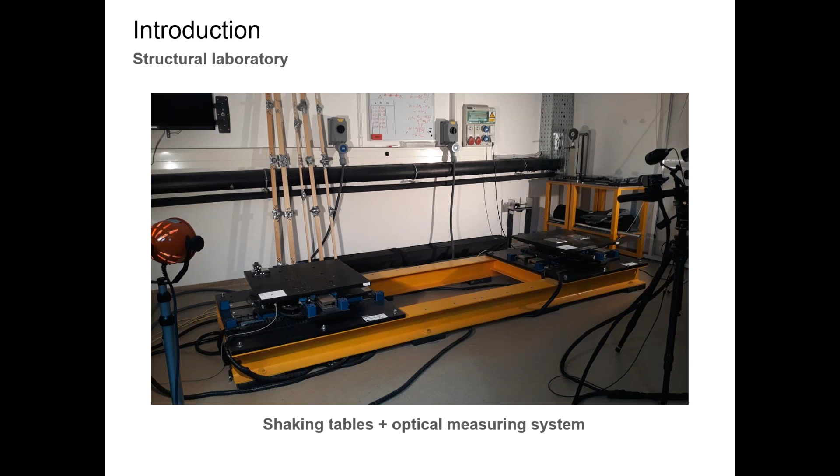And all the research has been supported through the research projects: Evidence-Based Characterization of Dynamic Sensitivity for Multi-Block Structures, Computational Simulation and Experimental Validation, which ran between 2013 and 2015, and the current research project, Configuration-Dependent Approximation in Nonlinear Analysis, Finite Element Analysis of Structures. These two research projects have been funded by the Unity Through Knowledge Fund and by the Croatian Science Foundation. The actual equipment has been acquired through another project, the Research Infrastructure for University of Rijeka Campus, financed by the European Fund for Regional Development.

My colleagues Nina and Miran and I were actually new to this analysis. So it is very important to say that the design of this lab and the idea for the research originated from our late colleague and friend, Professor Nenad Bičanić, without whom really we wouldn't be talking about this today, because we would never really be made aware of all the possibilities of the research that he has instigated here.

Professor Bičanić was a graduate of the University of Zagreb in the capital of Croatia, and worked as a project engineer in Croatia and the Netherlands. Later he joined academia and became associated with the University of Zagreb, Boulder, Swansea, Rijeka, and Glasgow. In Glasgow, he was also head of the Department of Civil Engineering, and was one of the founders of the National Society for Applied Mechanics in the United Kingdom in 1993.

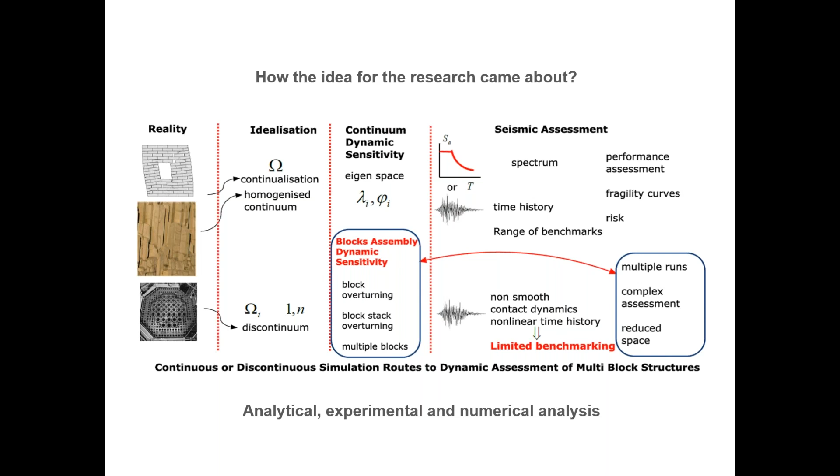We often have to repeat the analysis for many different variations of the internal parameters. So the idea was to set up a set of rather simple, small benchmark problems in which we would be able to analytically, numerically, and also experimentally run and have reliable answers to simple mechanical problems, so that we can validate our commercial programs against these examples.

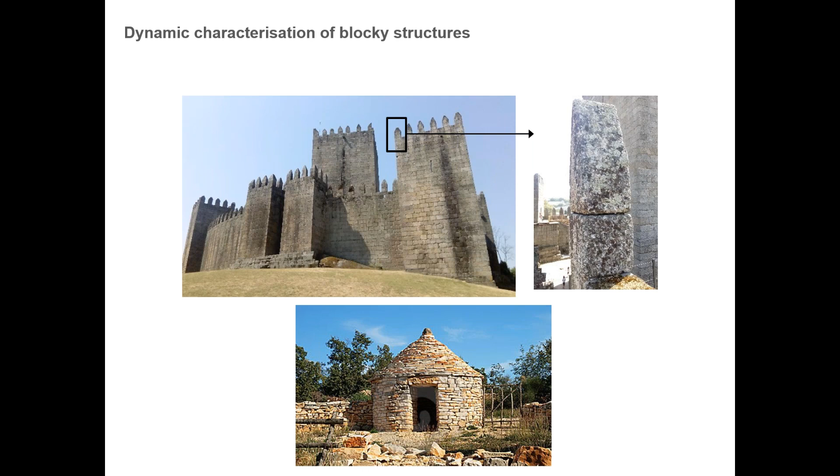What happens there is that you have such honeycomb structures in which you have these nuclear cores which burn. Nobody really knows what is happening with the actual structure, which has to be discontinuous because of the high temperature gradients these blocks are exposed to. So how they react to seismic excitation is something that is really more guessed than actually known.

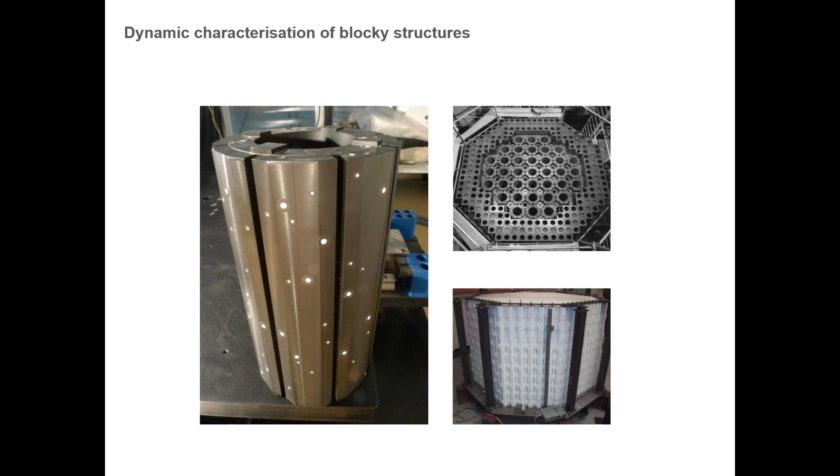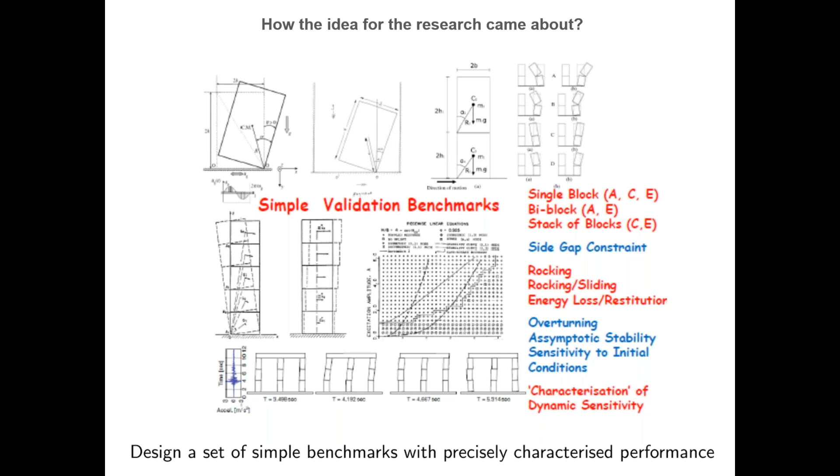The idea for this research, or rather the way to operationalize it, was to concentrate on some simple blocky structures or stacks of these structures, and to analyze how they react to seismic ground excitation or some other sort of ground excitation, and see whether they continue to rock in a stable fashion, overturn, or simply translate with the ground.

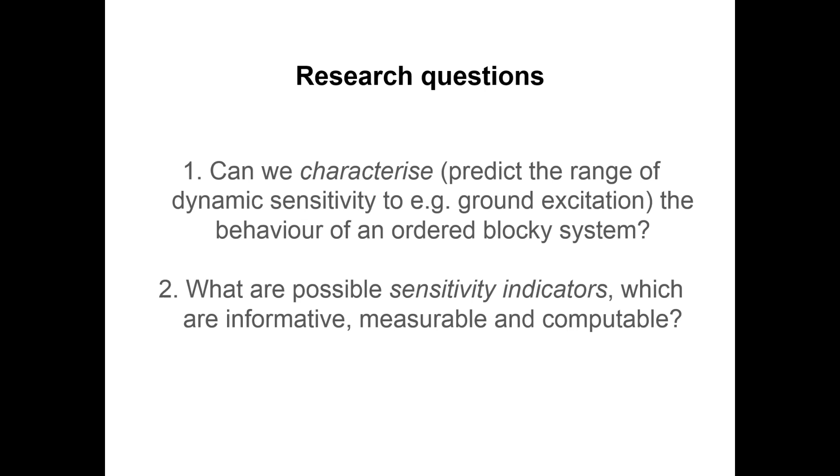Our basic two research questions are: can we characterize the behavior of an ordered blocky system? By characterize, we mean, can we predict the range of dynamic sensitivity to external influences, such as ground excitation? And also, can we come up with a number of suitable sensitivity indicators which we can measure and compute, and which are really informative, illustrating clearly the performance of the system.

This is how our structural dynamics lab looks today. The main part is these two shake tables, and we have the optical measurement system, as I said, with appropriate software. We also have some other equipment which we occasionally use, but we won't be talking about that today. And we have made up a little corner, as I showed you here.

Now, when you enter our structures lab, it looks like this. So this is the whole structures lab, and on the right side you see our little seismic corner.

What I forgot to say is that on top of this, we also have one small STI-40 platform. And what happens next is my colleague Miran will tell you something about the research we have conducted on this. Thanks, Gordan. My name is Miran Tuhtan, and in this next part I will talk about my use of the STI-40 platform.

The subtitle of my part is Assessment of Rocking Stability of a Rigid Rectangular Block Standing on a Deformable Elastic Beam due to Continuous Harmonic Excitation. In the next couple of minutes, I'll try to explain these bolded phrases in this subtitle.

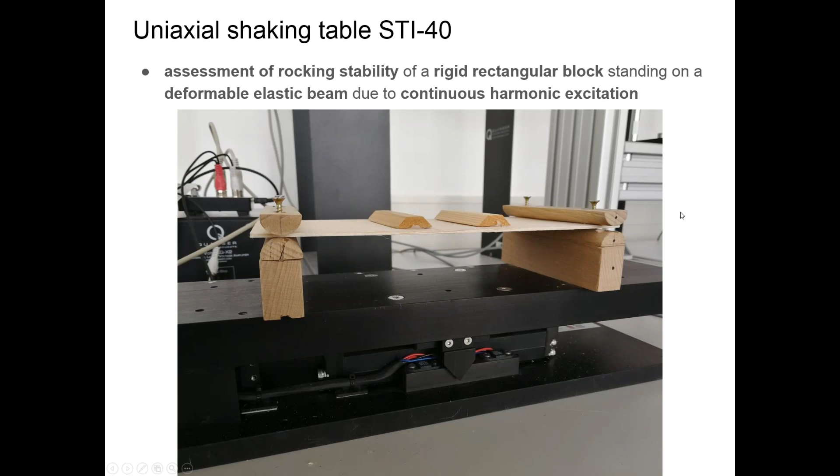Here you can see the system we use. This is the shaking table STI-40, and above it you'll see what's there. So the first thing to explain is the deformable elastic beam.

Here you can see three of them. They are made from balsa wood, which is very soft and elastic. We've made different thicknesses, so we can explore how different thicknesses and different elasticity help with the rocking stability.

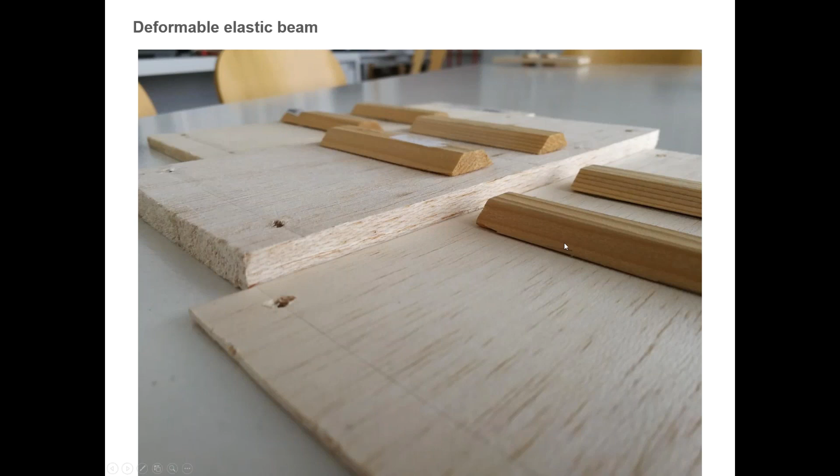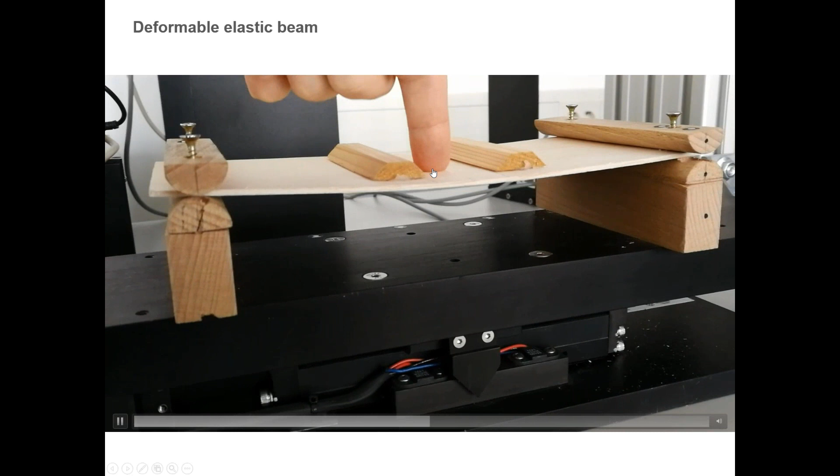Here is a video example of its elasticity. Here you see my finger pressing not that hard, and the deformation is highly visible.

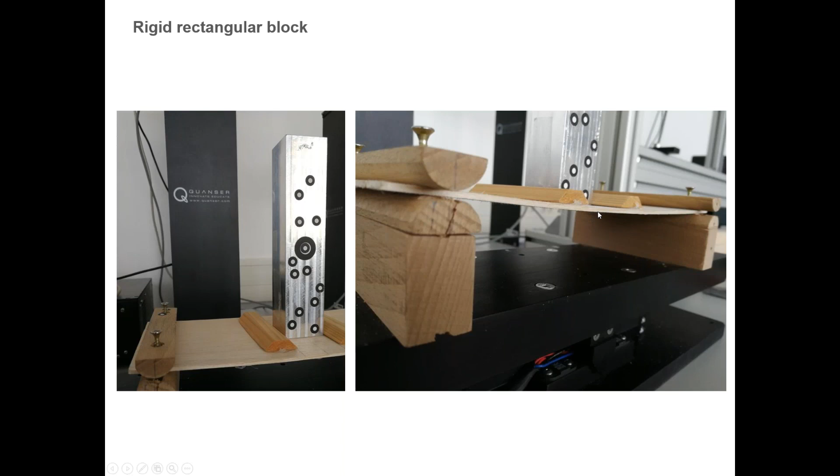Next thing in the subtitle is continuous harmonic excitation, and here you see a sinusoidal wave. This is what most of us think of when somebody says harmonic excitation, and this is the first type of excitation we did with our platform.

This was all well, until we realized we have a problem here at the beginning. The reason is here you can see the amplitudes as they change in time - this is a sinusoidal wave, and the velocities of this motion are cosine waves. That means where you have maximum amplitudes, you have zero velocities, and vice versa, where you have zero amplitudes, you have maximum velocities. That's okay here, but at the beginning when you start the experiment, you don't have maximum velocity, you have zero velocity.

So we need to modify how we do experiments, and we came up with this kind of graph, roughly divided into three parts. The first part is the ramp up period, where we slowly increase our amplitude from the central point to the maximum amplitude. In the second phase we have a pause, allowing our block and the system to stop shaking and movement. Then the third part is the cosine wave, similar to the top graph, which we use to see how the block moves.

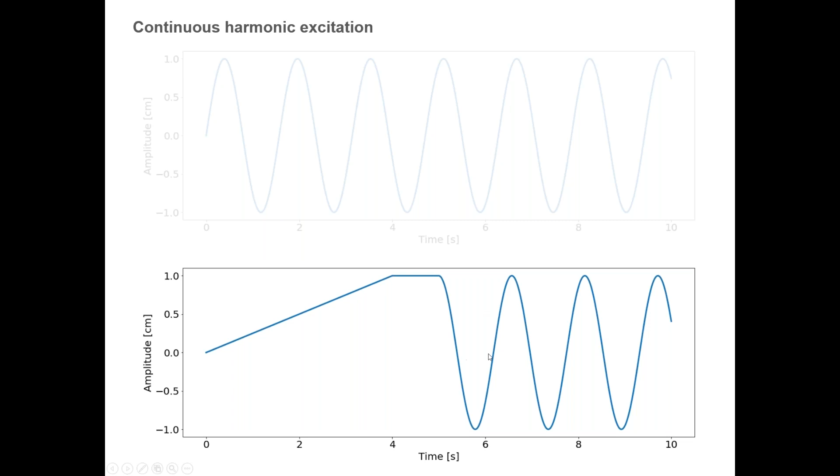The last thing I'll explain is the first part of the title: assessment of rocking stability. We have three types of motion of the block. First is translation, and here you can see the parameters used: 0.5 centimeter amplitude and 1.5 hertz frequency. Here in the video you'll see all parts of the motion.

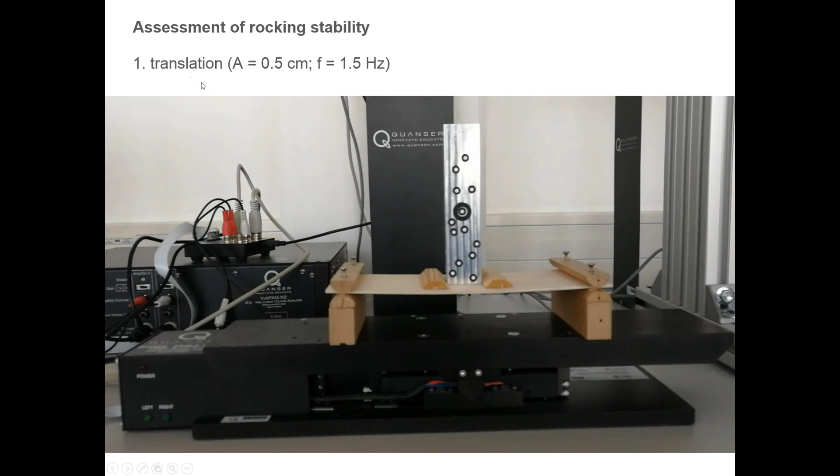First is calibration of the platform, then the ramp up period, a pause, and after the pause the whole system starts to move. As you can see, the block moves together with the base, so there is no rocking - the block is having translation motion.

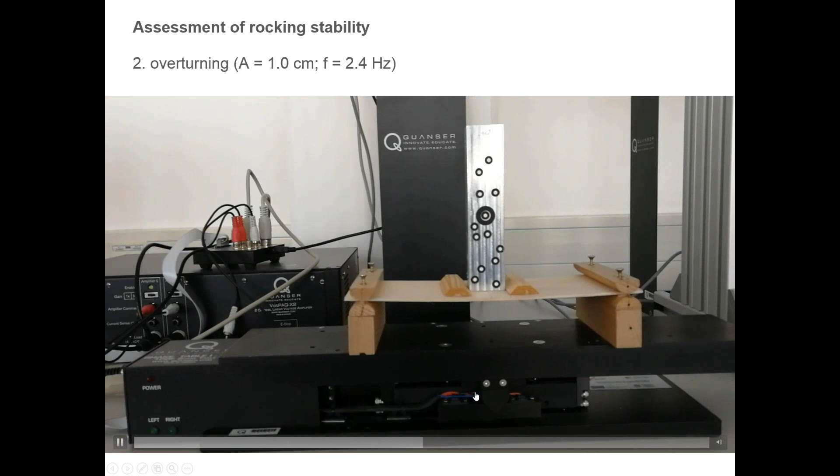The second type of motion is overturning. For bigger parameters of amplitude and frequency, you have higher accelerations. What happens is shown in this video. Once again, this was calibration, ramp up, pause, and now it will start to move. As you can see, the block fails quite fast.

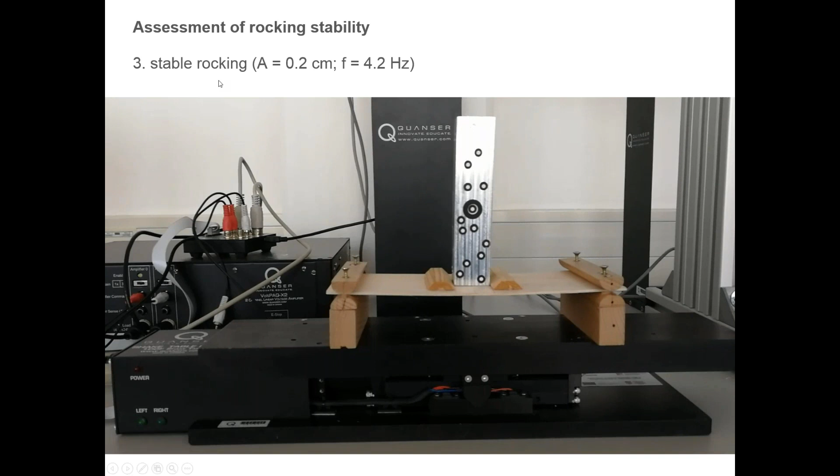The third, and for us the most interesting part, is the stable rocking, shown in this video. Once again the same thing happens: first calibration, then the ramp up period - quite small - then pause, and after that the block starts to shake, and you see it's stable rocking, it doesn't overturn. I hope you can also see that the base moves and vibrates because of the impact of the block on the base on every turn.

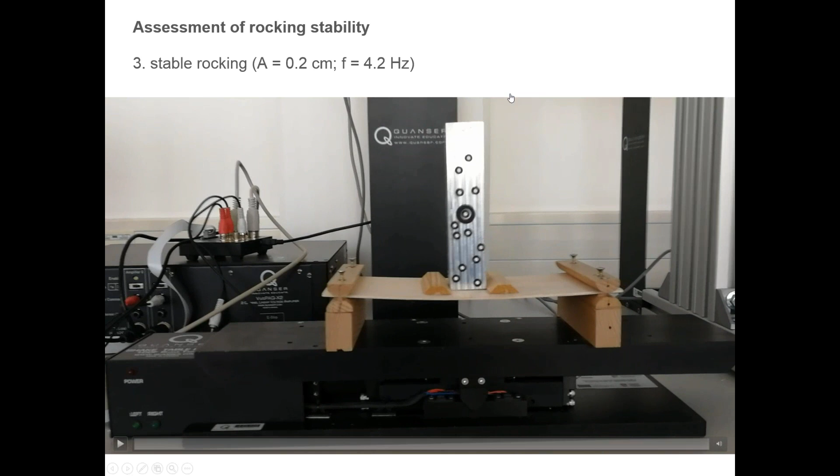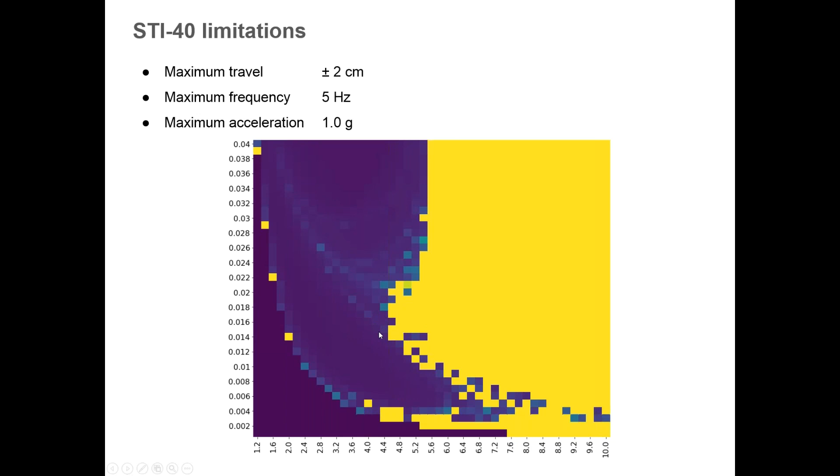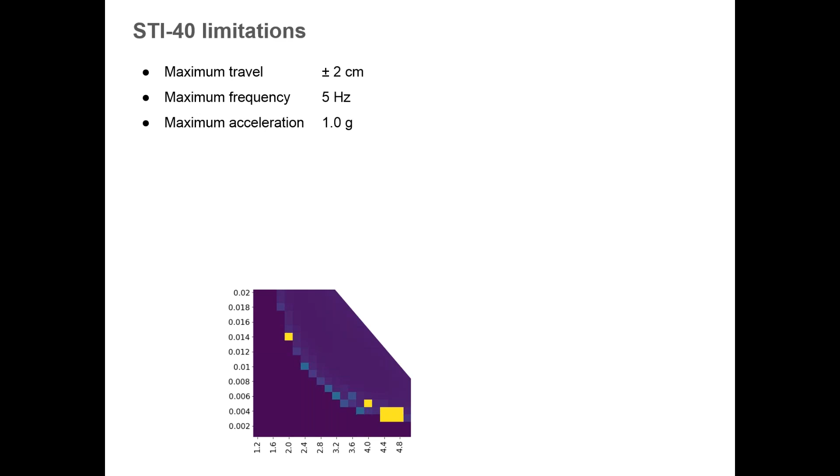So here, this region, in this numerical part, is quite interesting because it becomes a stable region, which we could not test on STI 40. So for the future, our plan is to repeat these experiments on our bigger platforms, and Nina will tell you more about them and some of their quirks and limitations in the next part.

Thank you, Miran. My name is Nina Ceh, and I will present the part of our research done using the biaxial shaking table ST3.

Here you can see the shaking table ST3, for example running when subjected to harmonic excitation in both directions. Along with that, we have an optical measuring system with 2 cameras, which lets us take video of the whole experiment, and after post-processing, get information about 6 degrees of freedom in 3 dimensions for everything in the video.

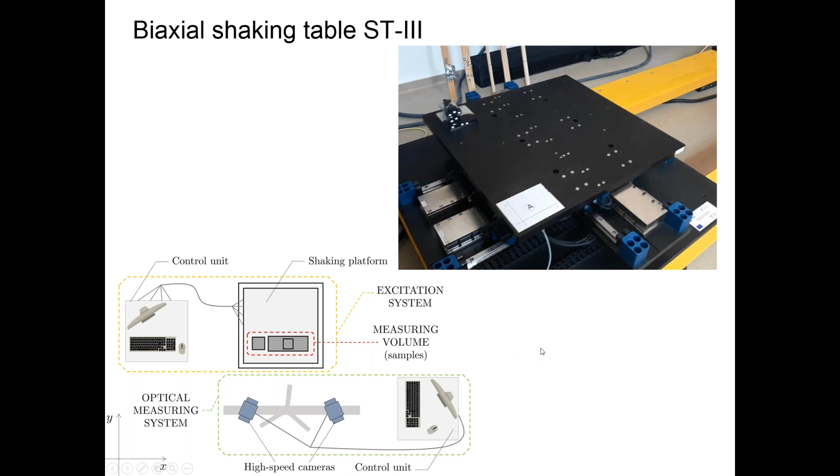What we are doing is trying to dynamically characterize the rocking of blocky structures, and similar to what Miran explained, we look at rocking of a single block, in this case on a rigid base. This block can only rock, it cannot jump or slide relative to the base.

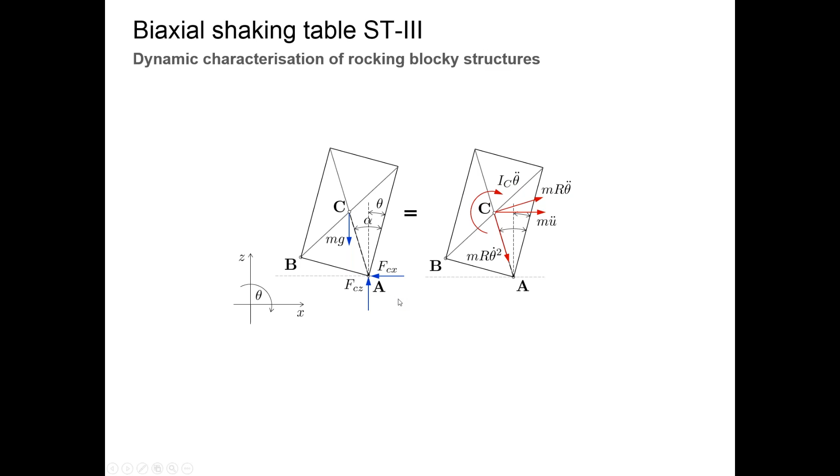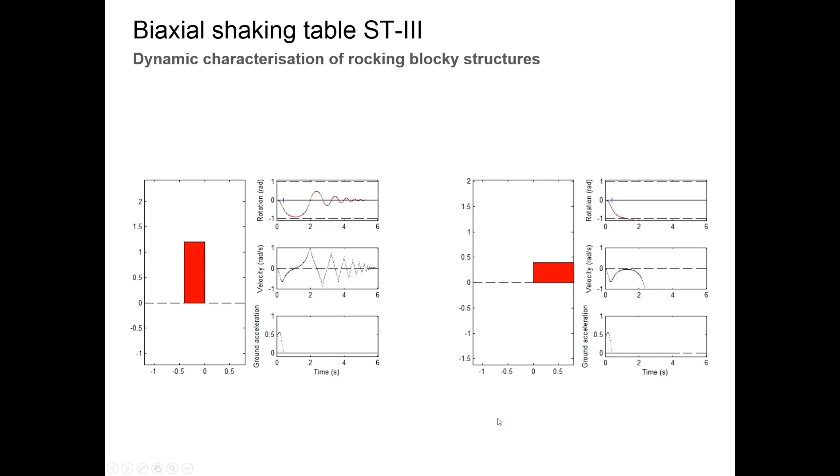From simulations of this rocking motion, we see that when the block is subjected to some ground excitation, it starts rocking, changes its center of rotation, impacts the base, and eventually settles. But if we slightly change the ground acceleration, the block will start rocking and then overturn. We are specifically interested in the conditions that make the block overturn.

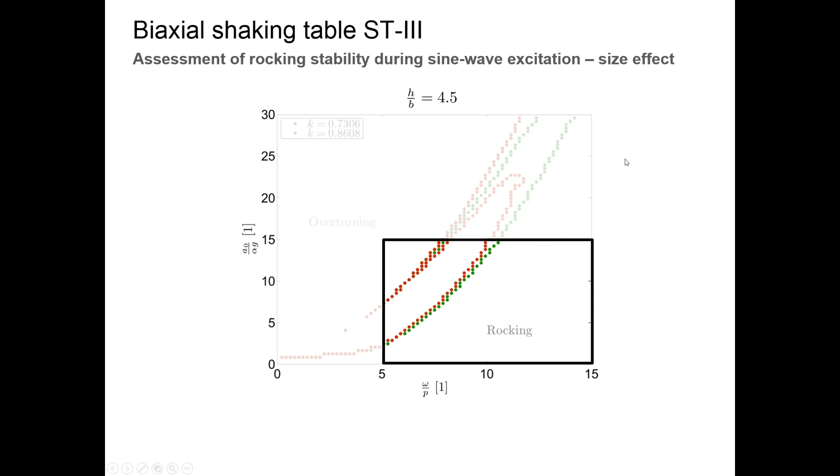The left part of the graph is not really interesting to us because there is no size effect visible there. The upper part is really interesting, but for this geometry we are not able to reach those accelerations, given the limitations of our system.

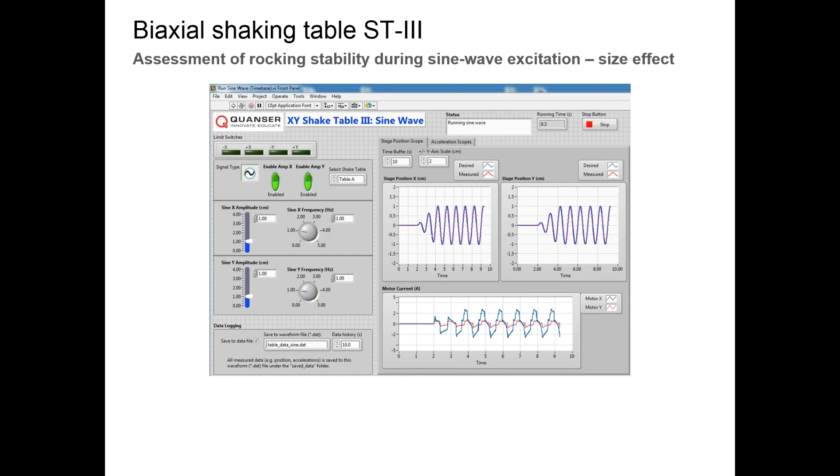Our shaking table system is run by software written in LabVIEW programming language. Since we have the code behind the software, we were able to modify it in order to get this kind of displacement profile as shown earlier.

Our experiments look like this. We have two blocks of the same height to width ratio, but two different sizes. It may seem that these are two separate blocks, but actually this is one block and this is one block. After subjecting these blocks to ground excitation, we can observe different behaviors.

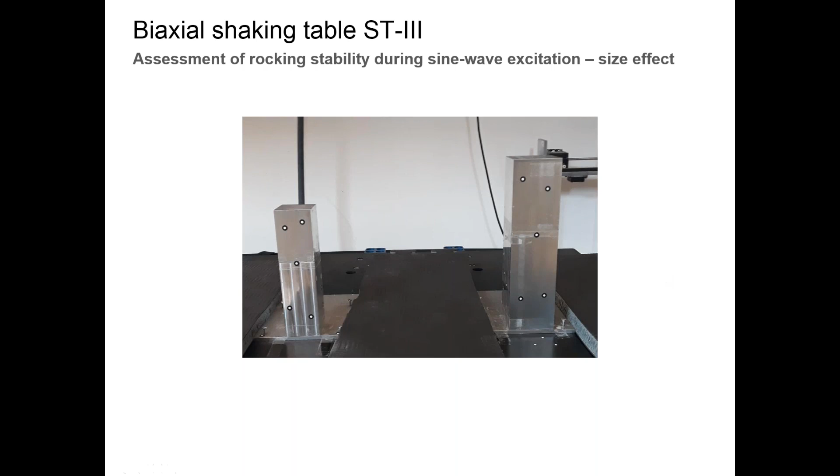For example, these are the blocks subjected to one ground excitation, where you can see that both blocks start rocking and after some time they settle. This rocking motion will be represented with blue crosses a bit later on a graph I will show with the results.

On the other hand, if we have a slightly different ground excitation, like this one, you can see that both blocks start rocking. The bigger block settles after a while, but the smaller block actually overturns, which means that the larger block can sustain an acceleration that is able to overturn the smaller block.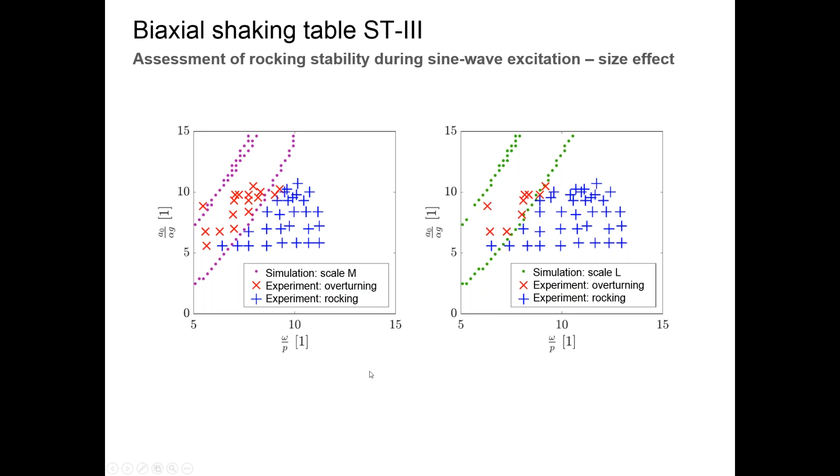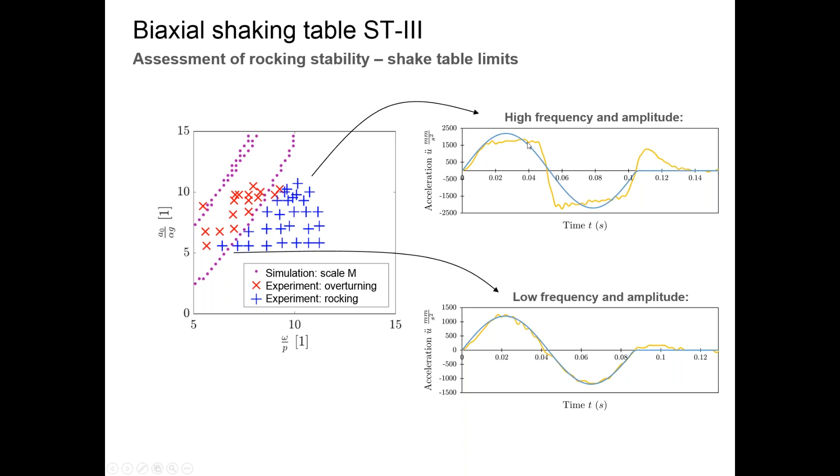But the upper part of the graph, which is pretty interesting to us, is the part where we already reach the table's limitations. Here we have high frequency and high amplitude of the acceleration function. We can see that what the table does resembles maybe a bit more a double constant pulse excitation than it does this sinusoidal curve. So we have to be really careful here.

The research we are doing now is assessment of rocking stability of a double block stack. We have a stack that consists of two blocks, one on top of the other. During rocking motion, this stack can go through 8 different patterns of motion, and it continues to transition from one pattern to another back and forth.

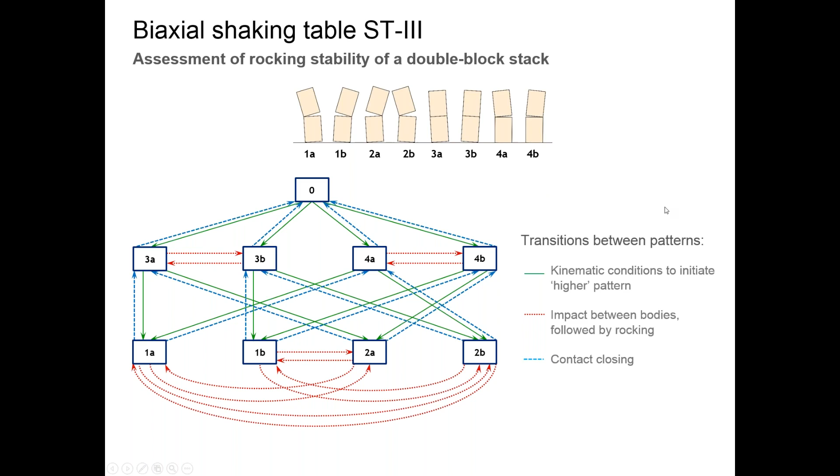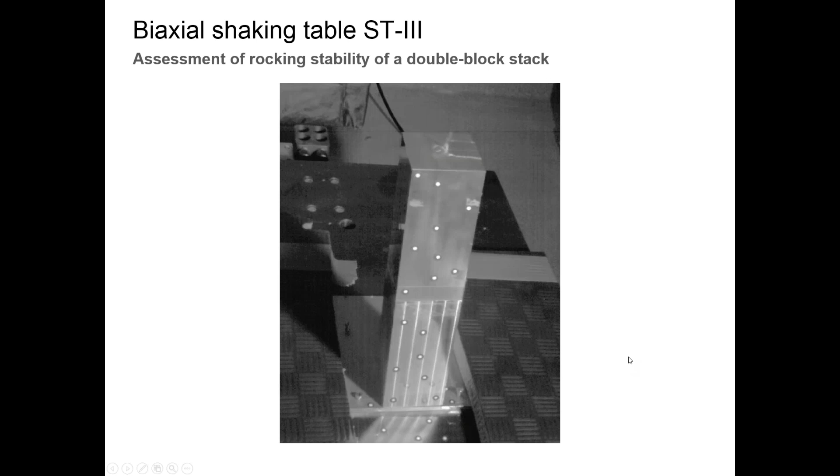This kind of behavior we also want to be able to notice when this stack of blocks is subjected to ground excitation. For example, here you can see an experiment where the stack is subjected to harmonic ground excitation of shorter duration. Even though you might not be able to see it on the video, at some points when the impact between the stack and the base happens, there is some kind of gap occurring between the top and the bottom block, so actually there is a transition between different patterns of motion.

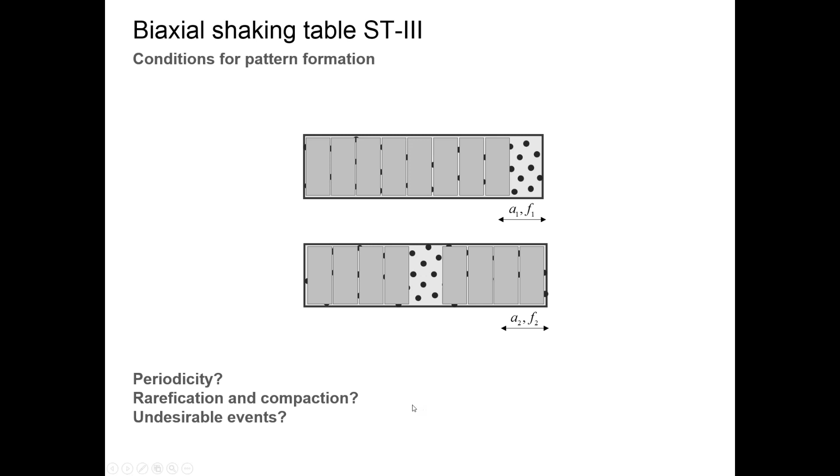Another research we are doing with the biaxial shaking table is trying to investigate the conditions for pattern formation. We have a basin with small spheres at the bottom, and on top of those spheres we have an assembly of rectangular discs. What we want to see is, if we subject this basin to harmonic excitation of a certain acceleration and frequency, whether we will be able to see some kind of periodicity in its behavior, maybe rarefaction and compaction patterns, and whether we will be able to notice undesirable events.

Just to show a little bit better, these are two examples of experiments where an assembly of 4 large disks or 8 smaller disks is subjected to sine sweep excitation of the shaking tables. These videos are slowed down, so this is not the real velocity.

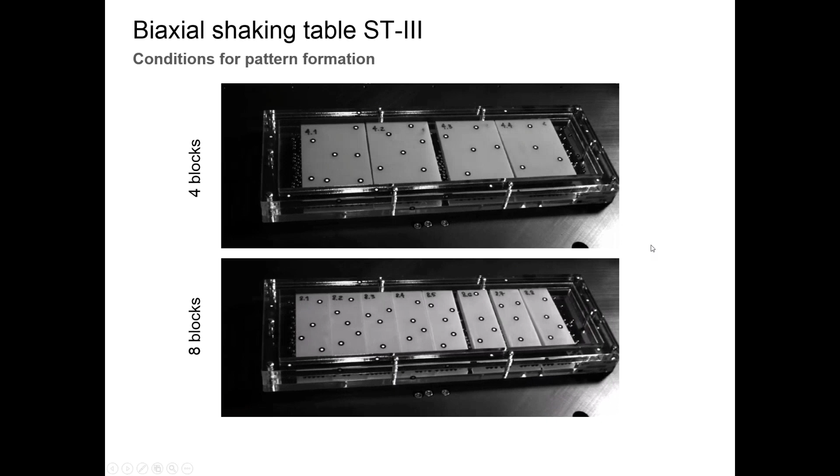Now the examples I'm going to show are not with sine sweep excitations. Here we have harmonic excitation that is long-lasting. In the first example, we have 4 blocks inside of the basin, and the excitation has an amplitude of 40 millimeters and frequency of 1 hertz.

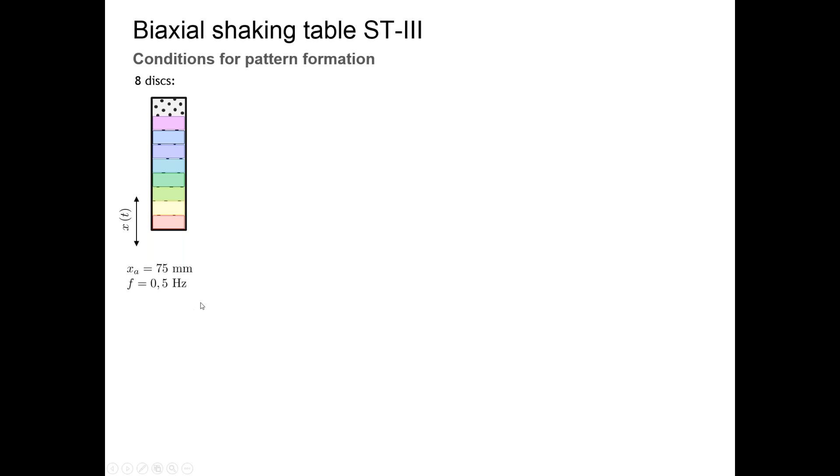That means multiple impacts happen between the bodies during the experiment, which indicates that this kind of assembly could damage much sooner than in some other case.

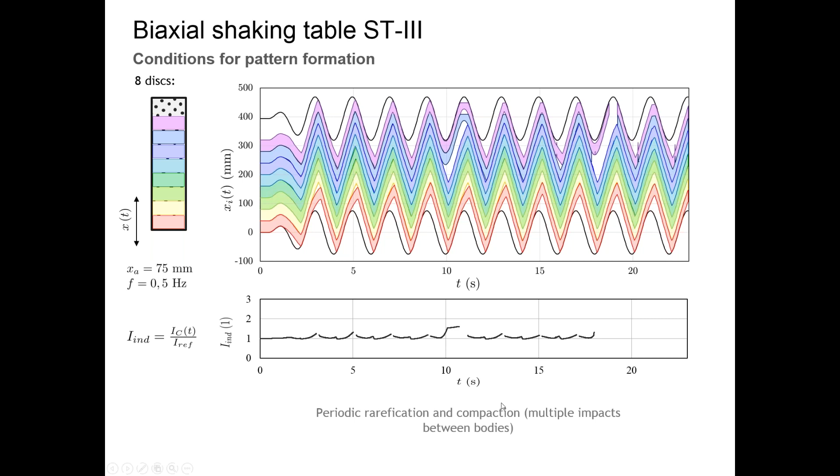Now I will leave you back with Gordan, who will show you the last part of our research.

Thank you, Nina. Finally, what we did last spring and summer, we had a final year student with whom we did some research on multiple support excitation. Here you briefly can see our model. It's a simply supported beam lying on both tables, supported by both of these tables, whose supports are then given some initial impulse.

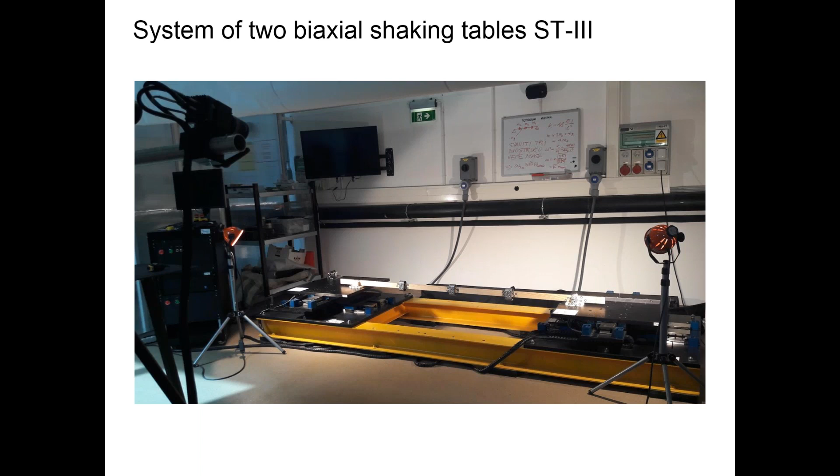The motivation for this research came from the observation that in large span bridges in earthquake-prone areas, there may be some time lag between the impulse reaching the first pier in a suspension bridge and its second pier, which may be 1 kilometer or 2 kilometers apart. We don't have such bridges here, but just to give you a picture, this is a bridge on the outskirts of Rijeka, our city here.

This bridge was built 38 years ago, and at the time it was the largest pre-stressed concrete span arch bridge in the world. It's not anymore, but this is an example of a bridge that has a moderately or largely large span for its type of 390 meters.

Okay, back to our example. So this is again the picture of our example. As you could see, we have added some concentrated masses on our beam so as to emphasize its modes of excitation.

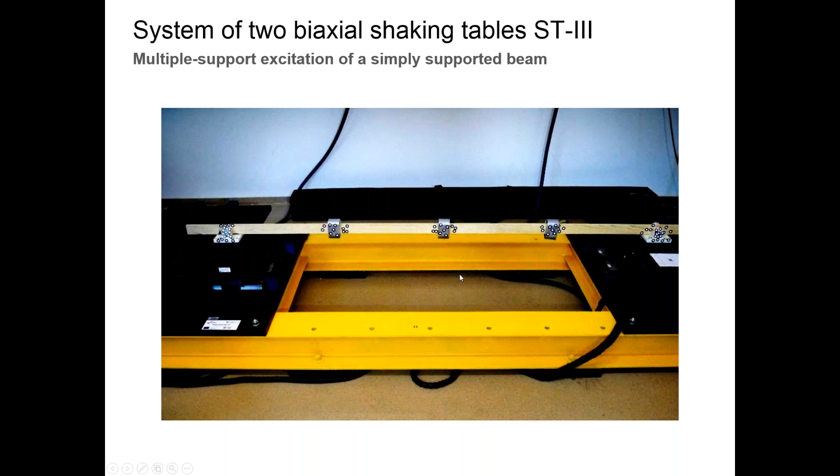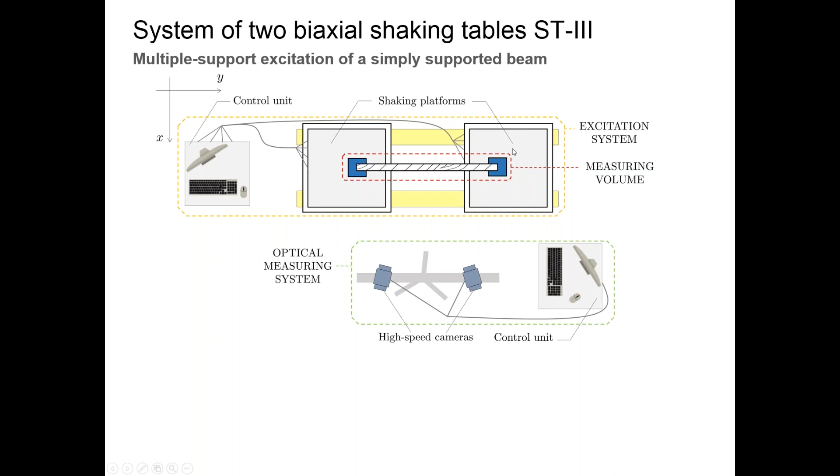So to go back to the scheme that Nina already showed you, we now have both shaking tables which we are capturing with our optical measurement system, and they are both given some ground excitation in a specific fashion that I will describe.

The actual model has these properties: certain length, certain mass, and concentrated masses are also given. Wood is a soft wood with the Young's modulus as given here. Second moment of area is easily computed from the cross section, and it is from another experiment that the Young's modulus is obtained, and from yet another experiment that the damping ratio is obtained by observing the history of evolution of the logarithmic decrement.

For this example, the first and second resonant frequencies are given here in the right-hand column, and just underneath we have the approximate values of the frequencies we have given to our shaking tables so as to simulate resonance. The experiments have been run with a very small excitation amplitude given to the tables of just 1 millimeter.

Okay, and you will see in the videos how this excitation amplitude is actually magnified due to the fact that we are nearing resonance frequency.

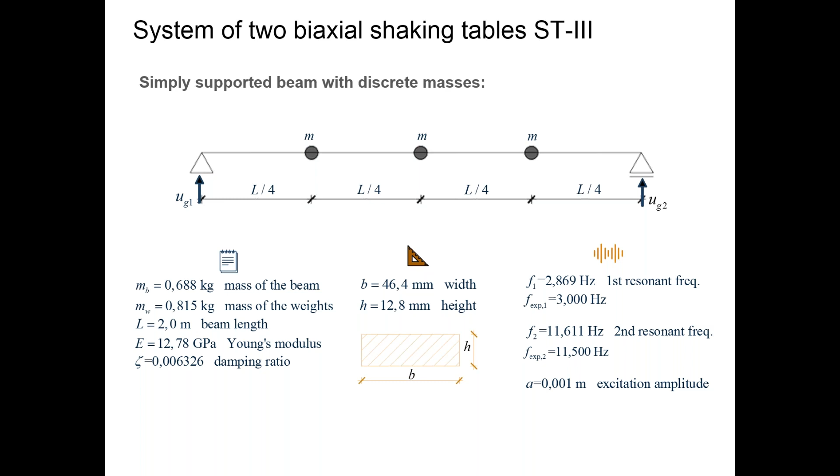Theoretically, we are talking about the equation of motion: mass times acceleration, damping times velocity, stiffness times position equals some external force. When we apply modal analysis, this system of equations of motion splits down into a number of independent equations of motion, which are easily solved.

This is the solution, of which the last part is of particular interest: the steady state part. The first part is the transient part that dies out very quickly. The steady state part is what we will focus on, in particular its amplitude, where we can see that the given amplitude is magnified when the excitation frequency comes close to a natural frequency of the system.

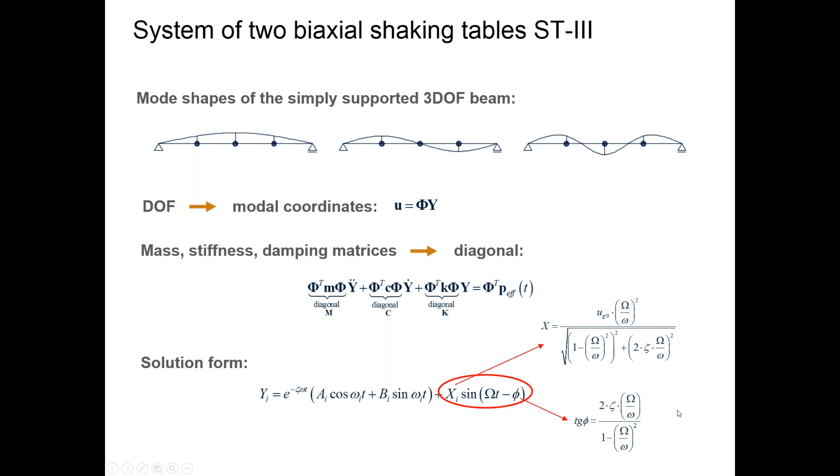In that case, you can see in the denominator that it gets very close to zero. The only reason why it's not actually zero is the presence of damping in this term. There is also some time lag, but let us focus on amplitude.

Back to our experiment: our wooden beam is enriched with concentrated masses given at the quarters of the span, and then we have simple supports which are printed on a 3D printer and attached to our shake tables, which are given ground excitation. These are the cameras that monitor the motion.

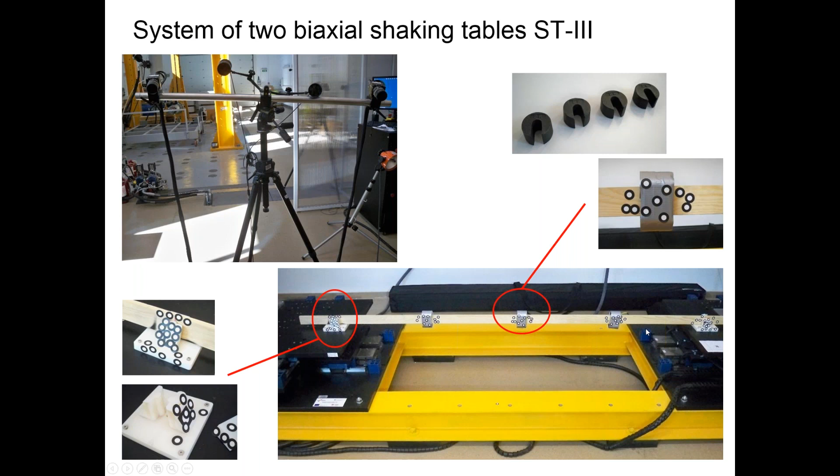What we have is basically two important and interesting situations: first resonant frequency and second resonant frequency. When we give excitation near the first resonant frequency, we expect symmetric modes of excitation to pop up. Later, when we repeat the experiment with asynchronous excitation, where displacements of different magnitude but same frequency are given to the supports, we expect the skew symmetric part of the motion to surface. But let's go back to this example here.

Now we prescribe displacements to our platforms in unison, completely synchronously, as you can see here, so they run in both directions at the same time.

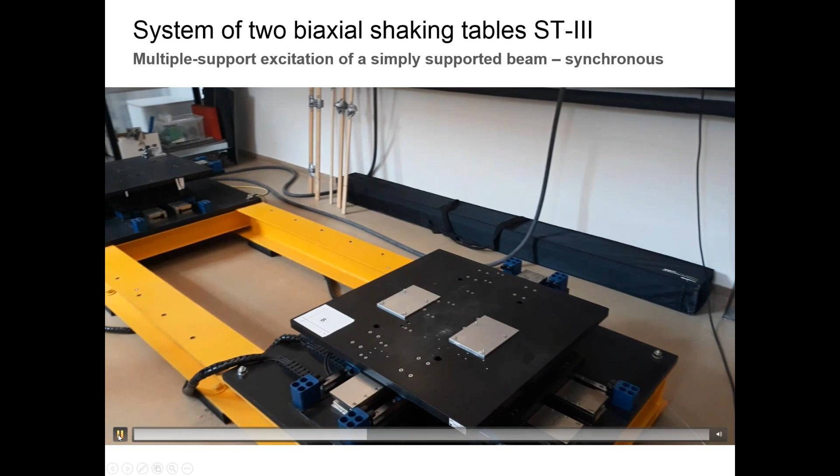Of course, the actual magnitude given in our experiment is much smaller, only 1 millimeter, so you won't be able to see any motion in the tables, but look at the beam. This is the first excitation frequency, and the symmetric mode, the symmetric shape of deflection, can clearly be seen.

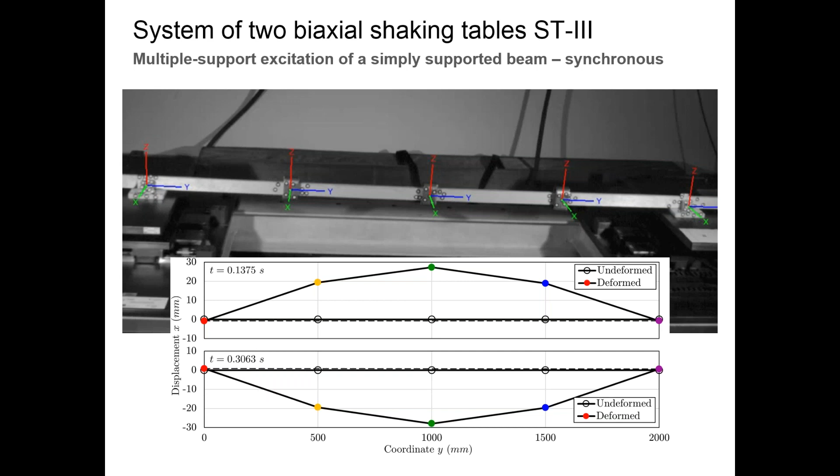This is also visible in our graphs, which show that this symmetric mode of motion is in fact our first mode of motion, which is in complete correspondence with the fact that we have given the first resonant frequency, not the second one.

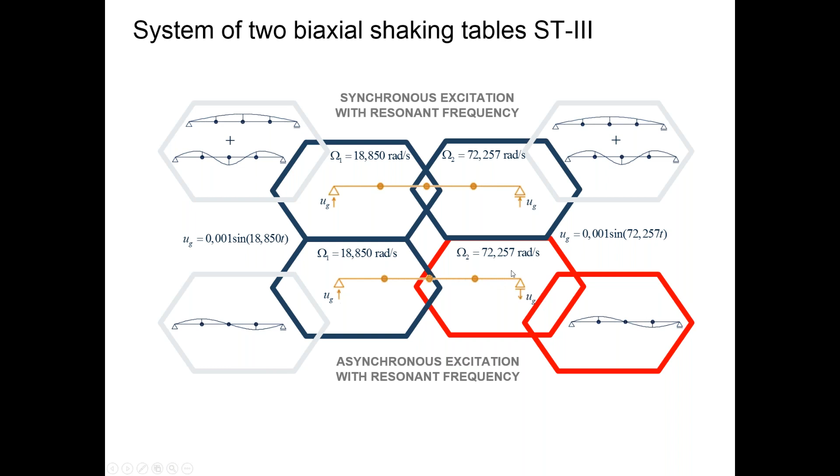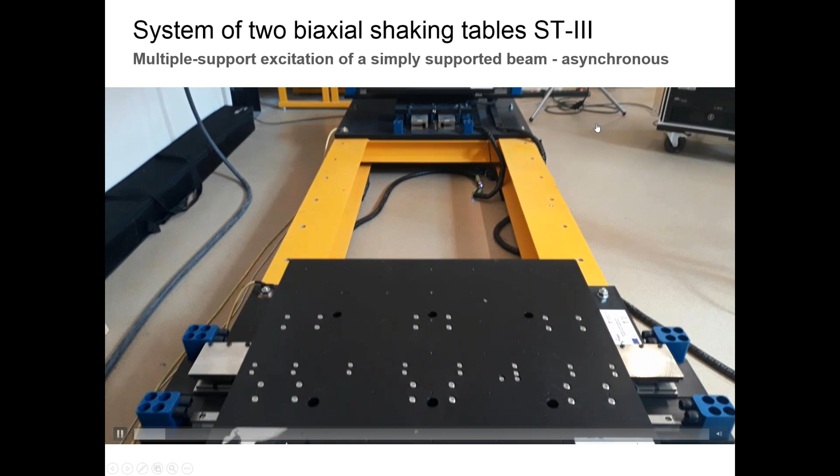Now, when we give asynchronous excitation with the frequency corresponding to the second resonant frequency, again with the same amplitude, the tables move in opposite directions with respect to one another.

Again, we give it with a smaller amplitude of just 1 millimeter, and what we obtain is such a motion of our beam which reflects the fact that we are very close to the second resonant frequency, and only the skew symmetric part of the motion is clearly visible here.

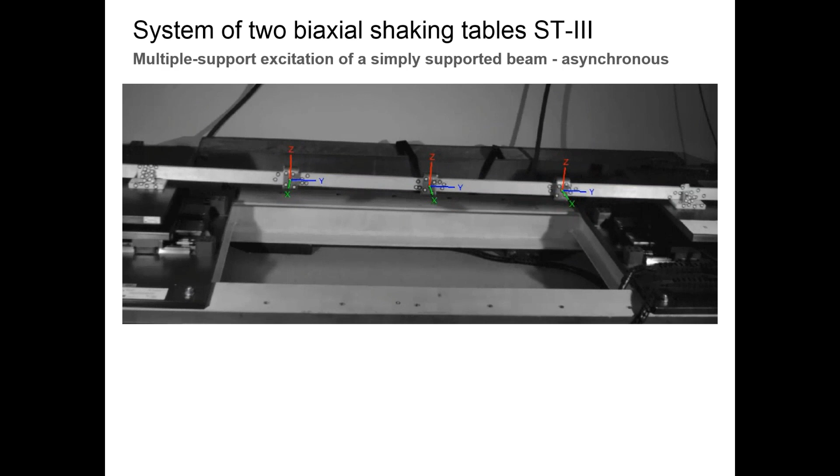We have had many other plans for our research, but we didn't manage to do all of them. Let me just mention, to close it up, that such research is important when it comes to actual real seismic signals.

But now, if we repeat it by just giving a time lag of 1 second between the supports, we can see quite a different response. There is no such large impulse at the beginning of the motion, but the actual response of the structure later on is much more pronounced in its displacement than it was earlier when we gave synchronous excitation to both supports.

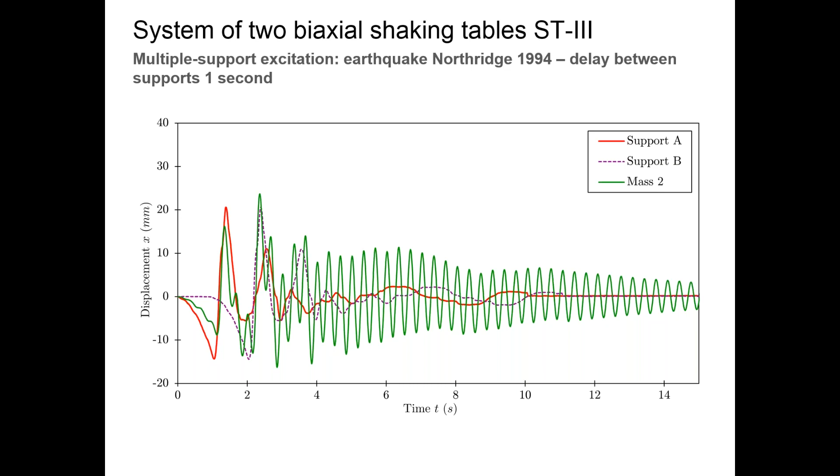Thank you for a very interesting presentation. I think there was a lot of interesting stuff and a lot of interesting research. And we have a couple of questions from the participants.

The first one is a question regarding the experiment with two-block motion. In this test, it seems like you tried the test in lower frequencies. Have you also considered higher frequencies in your experiments?

Yes, actually with the two blocks, we want to conduct roughly the same series of tests as we did with one block. So we want to know what the behavior will be with respect to different amplitudes and different frequencies of the acceleration. It's research that is just beginning, so I showed just one example that we did. But yes, we want to cover the full area of different excitation amplitudes and frequencies.

And actually, what we are particularly interested in is whether, for some kind of conditions of the excitation, maybe in some case only the top block will overturn, or in some case the whole stack will overturn altogether. So we actually want to get the conditions that make only partial or total overturning of the stack.